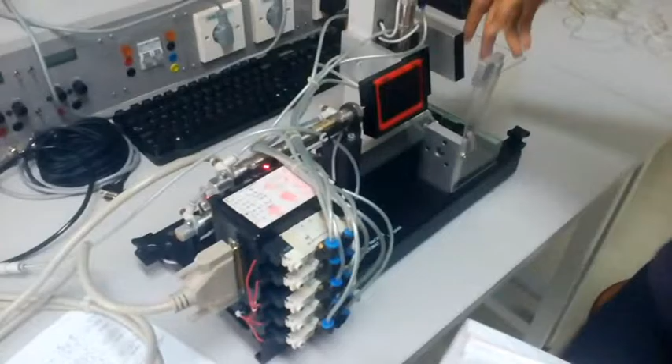Okay, today with my team, Alif Nur Iman and Afiz Zafran, we present our project, an automatic stamp machine. So before we run this project, I want to tell you about the input. I is the input, Q is the output. Okay, this is the stamp machine. I want to tell you firstly about the output.

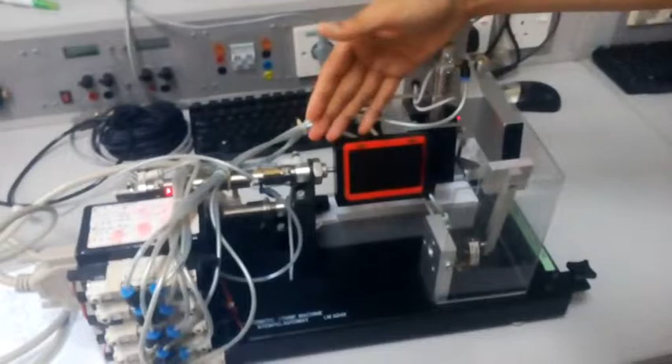First is the clamp. Q4.3 is for retract. Retract is go up, and extend is go down, as Q4.2. Okay, next output is the ink. We declare Q4.5 will extend, and for the retract, Q4.4 will retract.

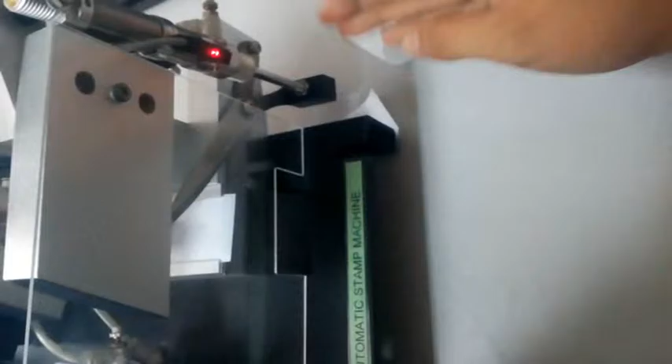Next output, this is the movement of the cylinder. We set the extend for cylinder as Q4.6, and the retract is Q4.7. Next is the output for the scissor. This condition is retract, Q5.0. When the scissor is extend like this, the condition is Q5.1.

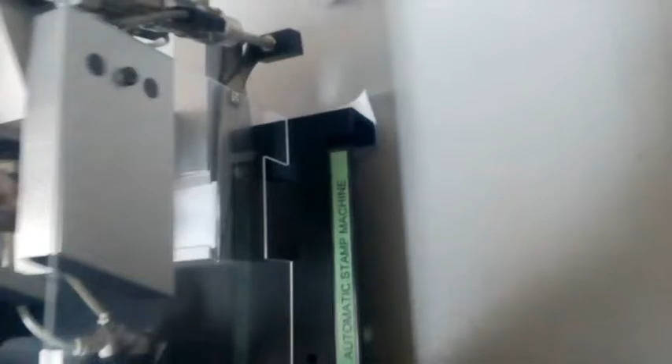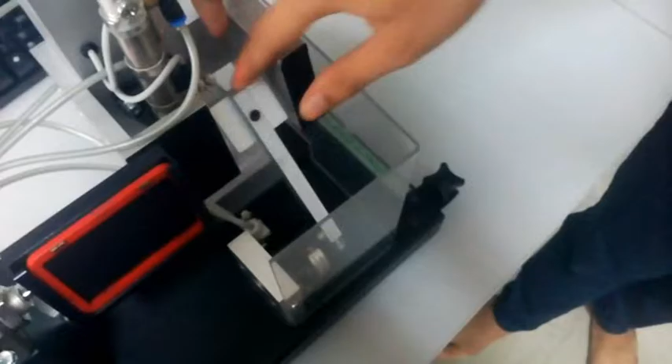The last output is stamp. Stamp we set as Q4.0 will go down, like this, and the next output is Q4.1 for stamp up, just like this. Next we go to the input. First is the sensor of clamp. As we can see, the clamp is in the extend condition. This is the sensor clamp for extend condition, and this is the sensor for clamp retract.

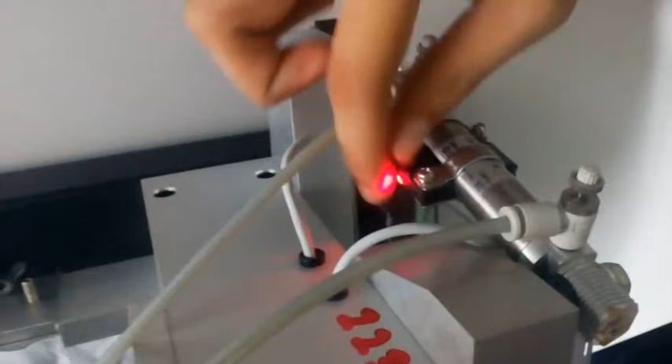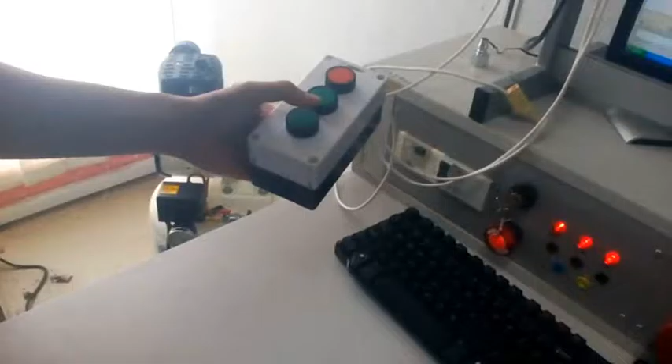Next sensor, this sensor is for ink. Sensor ink I0.2 is retract, and I0.3 is extend. Now the sensor of the scissor. The condition of the scissor is extend, so the sensor will detect this. This is extend for scissor, and this is the sensor retract for the scissor. The start button is I0.1 and the stop button is I0.0.

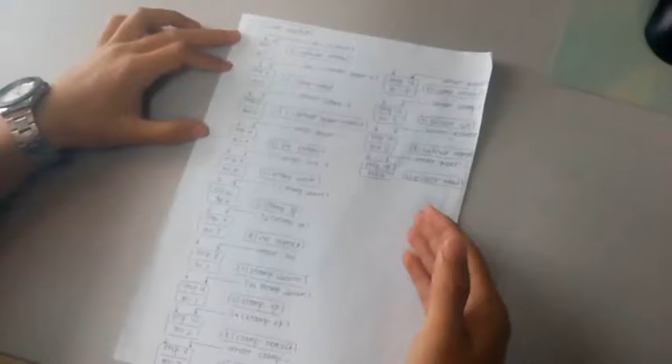Thanks to Hafiz for telling about the input and output of the machine. Now I will tell you about the steps we have to make. Here we have the sequence step diagram, with about 15 steps. At first we have the initial condition. Next we have step 1, which is M0.1. To make step 1 operate, we must get a command from I0.1, which is the start button. When this step is done, the cylinder extends. Then it goes to step 2, which activates M0.2,

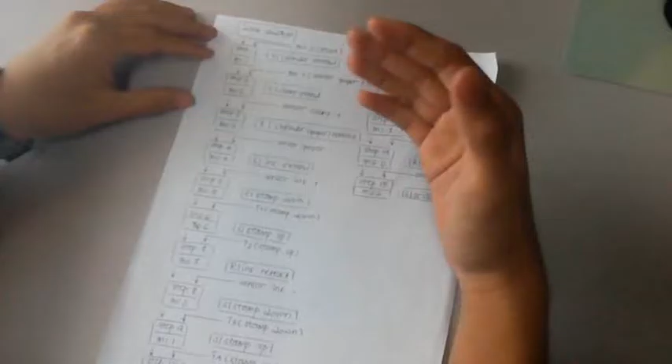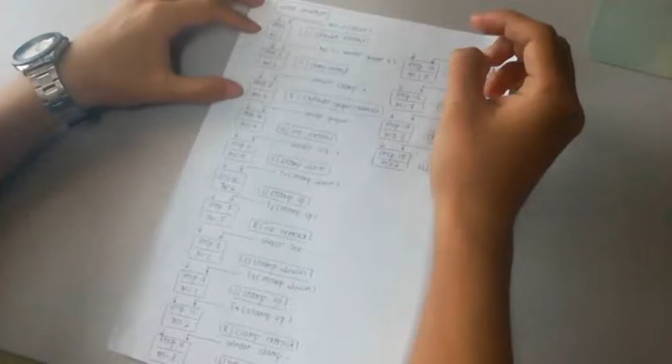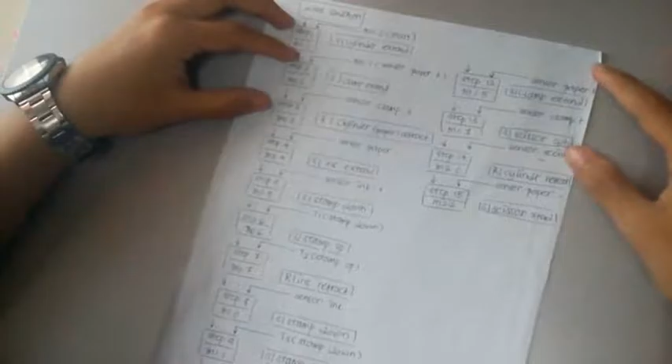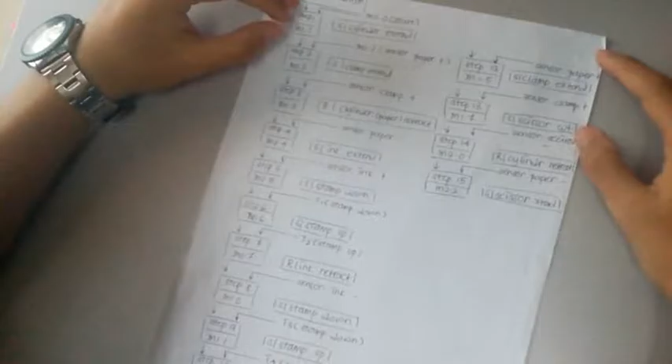and it will activate the clamp to extend. Then it goes to step 3, getting a command from sensor clamp extend. It activates M0.3 and resets the paper cylinder to retract. After that it goes to step 12, which we declare M1.4. To activate this step, it goes through the sensor paper extend, then makes the clamp extend again. Then it goes to step 13, which is M1.5.

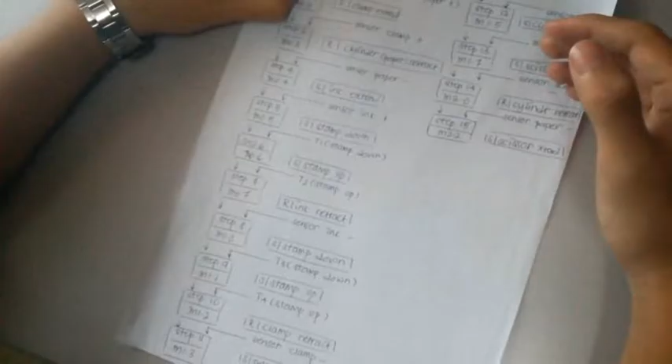After the sensor detects it, it commands the scissor to cut. Then it goes to step 14, which is M2.0, where the cylinder retracts to its place. Then it goes to step 15. Step 15 only activates after the sensor paper cylinder retracts, and it causes the scissor to retract again. So this sequence loops again and again.

Now I want to show you the program for this assignment. This first network is for all the initial conditions of the stamping machine: sensor paper retract, sensor clamp retract, sensor ink retract, and sensor scissor retract, which means nothing has moved yet. M0.0 stores all of these initial conditions.

So to move to step 1, you must go through M0.0 and press the start button. When the start button is pressed, M0.0 tells M0.1 to move the cylinder, so the cylinder extends, which I label paper plus, plus means extend. Then it goes to memory M0.2, which detects sensor paper plus and tells the clamp to extend. I push the start button and the machine runs.

Okay, I press the stop button. It's done. So you see from the sequence to the program to the simulation. This task showed us how PLCs are programmed for industrial applications such as a stamping machine. This is only an assignment, but in industry PLC programs are used for other purposes like dropping objects, conveyors, drilling and milling.